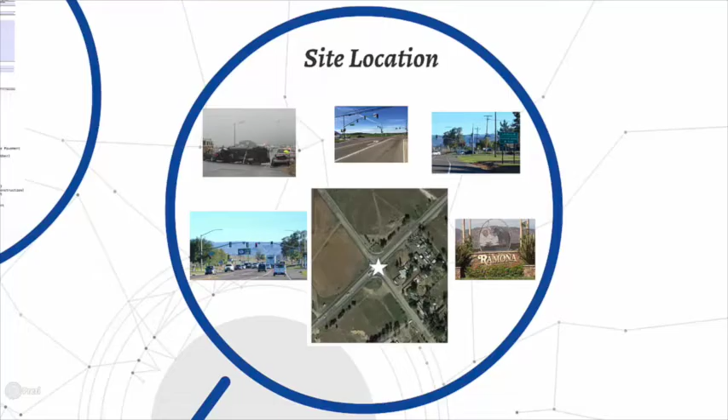This study was done to evaluate the potential geological concerns at the subject site, as it relates to the proposed development and design parameters. Based on the map from the Hydrology Manual of San Diego County, the soil in the area is Class C, meaning that it has a slow infiltration rate. There are no fault zones in close proximity, as well as no active seismic zones.

However, the soil on site is prone to liquefaction, which is why the topsoil and subsurface soil should be removed and compacted again. Earthwork will consist of site preparation, excavation, and compaction. Any compressible material must be removed, and oversized rock should be hauled off-site. The soils on site can be used for compacted fill if they do not contain any debris, organic materials, or oversized rock. The fill soils should be relatively compacted to at least 90% based on the maximum dry density of the ASTM test method D1557.

An R value of 30 was used for the pavement design based on our experience of the area and the review and evaluation of geological and geotechnical literature. The new pavement structure will consist of a hot mix asphalt surface course and Class 2 base and subbase. After conducting a geotechnical investigation of the site, the proposed development is feasible from a geotechnical perspective.

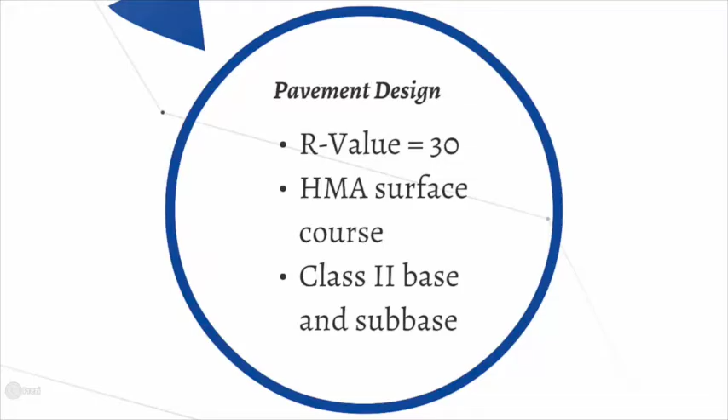The existing facility consists of SR67, which is a 2-lane rural highway with traffic lanes and shoulders of 12 and 8 feet respectively. A 12-foot left turn lane and a 12-foot right turn lane are present in the north and southbound directions, and it is maintained by the state of California. Highland Valley and Dye Road consist of a 12-foot traffic through lane, one 12-foot left turn lane, and an 8-foot shoulder in both directions, and it is maintained by the County of San Diego.

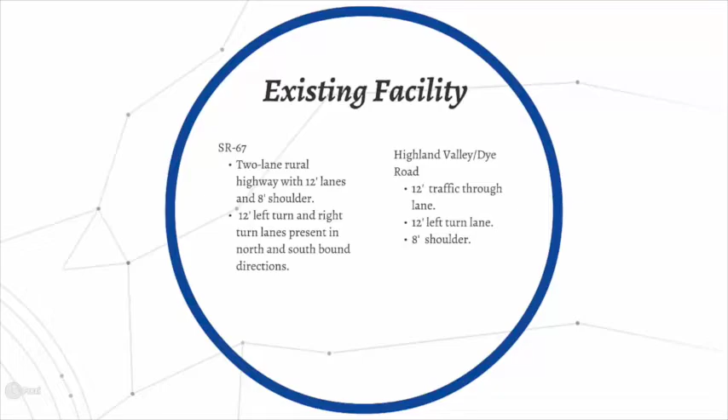The traffic analysis report analyzes the current traffic and future conditions of the intersection. This is a key intersection but experiences more traffic than nearby intersections. The existing peak hour volumes were analyzed to assist in determining the level of service. The method used to determine the level of service of the intersection was based on average vehicle delay from the Highway Capacity Manual and the principles of highway analysis. The level of service of the intersection is usually E or F, which is undesirable and considered unstable flow of traffic, and it should usually be C or higher.

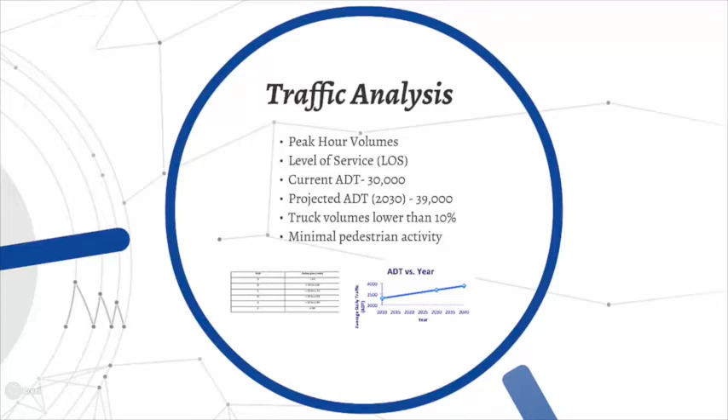Average daily traffic volumes of the intersection are around 30,000, and the projected future traffic will be around 40,000 by 2040, meaning there will be a 33% increase at least. It is important to consider truck and pedestrian data for design. Truck volumes are typically lower than 10% in the area, and there is minimal pedestrian activity. It is recommended to design a two-lane roundabout to improve the flow of traffic.

Intersection volumes were converted into roundabout volumes to determine the number of lanes based on the operational analysis by the National Cooperative Highway Research Program report. The capacity was usually greater than 1,000 passenger cars per hour, so at least 2 lanes are required based on the report. The circulatory roadway shall consist of individual lanes of 14 feet, resulting in a total of 28 feet. The central island will be 108 feet, and there will be a truck apron around it. The inscribed circle diameter is 180 feet.

SR67 and Highland Valley Dye Road both will have two 12-foot lanes in both directions, separated by splitter islands. Since there is minimal pedestrian activity based on the traffic analysis, the design includes a 5-foot bicycle lane that will end near the crosswalk for the pedestrians on the splitter island, so bicyclists can traverse the roundabout like pedestrians. According to the traffic analysis, SR67 experiences much more traffic than Highland Valley Dye Road, and through traffic volumes were substantially greater than the right and left turn traffic.

The proposed roundabout shall include entry radii that are larger on Highland Valley Road than SR67, since the most volumes are through traffic on SR67. To achieve this, the alignment of the roundabout will not be exactly on the intersection to promote the desired curvature

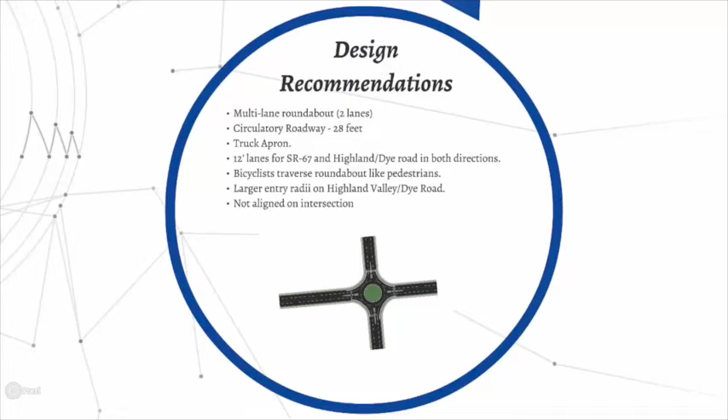for the radii. This design shall allow the traffic on Highland Valley Road to decelerate and yield due to the larger entry radii for deflection, so the most traffic volumes, which is through traffic on SR67, can be distributed consistently, resulting in an improved flow of traffic, improved level of service, and reduced congestion.

Ramona City is within the San Dieguito watershed, which is one of the 9 watersheds in San Diego County. The intersection is part of Santa Maria Valley hydrologic area. The natural water paths direct the water flow towards Santa Maria Creek. Based on the hydrology study conducted on the project area, the stormwater runoff drainage system is designed.

Prior to designing the roundabout stormwater drainage system, the existing condition was studied. 3 culverts were found in the project area. The 2 on-site culverts will be removed in the proposed modifications applied on the drainage design. The off-site culvert is found to be applicable for the proposed drainage design.

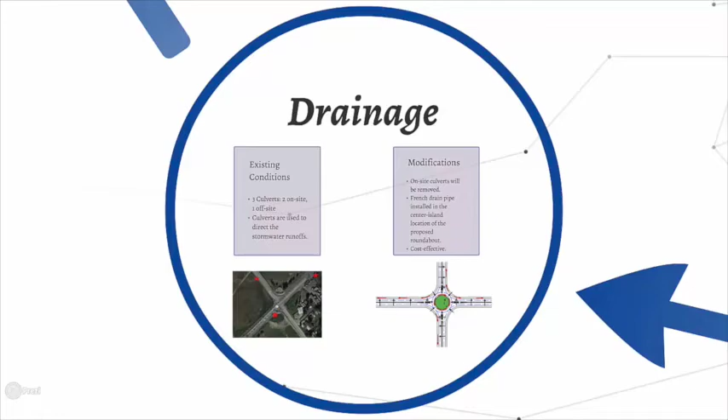The proposed runoff drainage design for the roundabout features 1 pipe installed at the central island of the roundabout. The circulatory roadway will be downgraded with 2% slope, which allows the runoff to flow towards the curb opening. An open channel will be implemented to carry the runoffs to the pipe. Roundabout legs will not feature culverts. Legs will be graded with 2% slope.

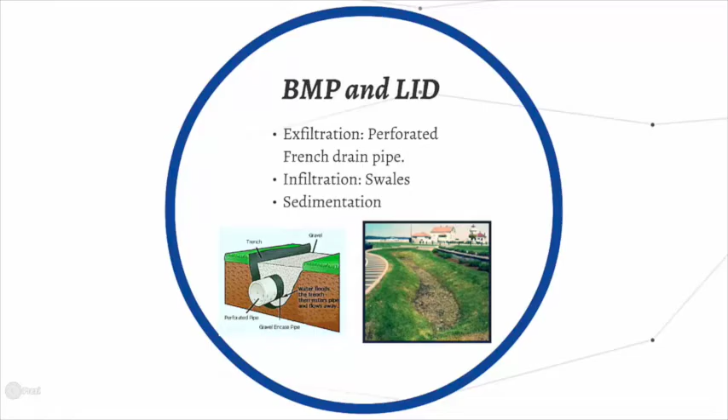To meet the BMPs and LIDs requirements, swales will be used to infiltrate stormwater runoffs. Also, a perforated French drain pipe will be implemented. Coarse gravel will cover the surrounding area of the pipe to aid in exfiltrating the stormwater runoff.

The construction scheduling of the project starts with a basic planning for the work breakdown structure and ends with a detailed graphical representation of the sequence of tasks in each sector of SR67 and Highland Valley Roundabout. The objective of scheduling is to determine the time and sequence of all operations in the project and their assembly to give the project its overall completion time, and hence find the compatibility with the project's cost.

With the utilization of programming tools such as Primavera P6, the procedure of scheduling starts with breaking the tasks into digestible set of components, establishing task durations based on realistic estimation and application experience, and binding the activities together through specific relationship types to run the critical path method, CPM.

The reason behind using CPM method is to manage the time needed for the network activities to be completed and list the critical activities in a mathematical algorithm. This method helped us determine the start and finish dates of each activity.

The work breakdown structure contains earthwork, structural items, drainage items, environmental items, traffic items, and other specialty items. Each section contains activities that are internally connected with relationships and externally connected with other sections' activities.

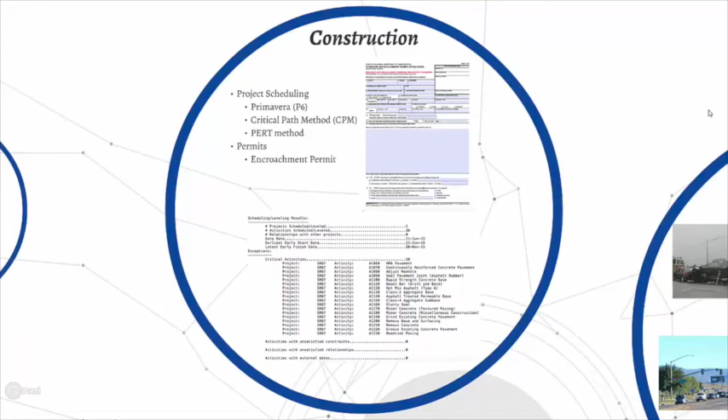The study of the environmental impact report discusses the impacts and issues that might arise from the proposed project. The project includes various environmental concerns that can be potential issues regarding the environment. Mitigation attempts were taken to lower the impacts on the environment before the project initiation. There are 4 different areas that are considered to be affected with the project being accepted. Those areas are biological resources, water quality, noise, and air quality.

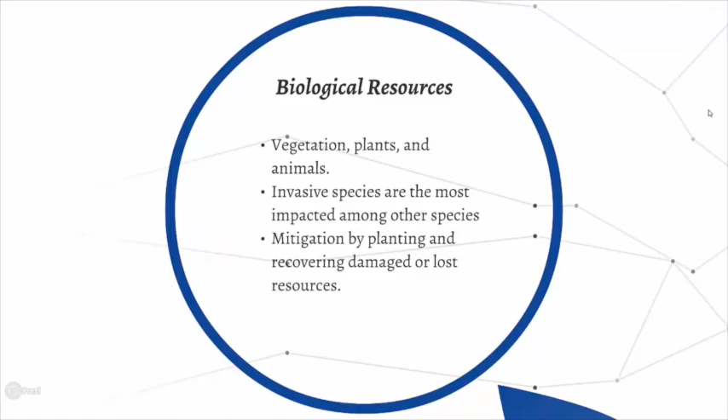Biological resources are of most concern in this project. It is required to mitigate any impacts on the biological resources that include vegetation, plants, or animals. Invasive plants are the most impacted resources in this project. Mitigation plans were carried out for those invasive species by relocating the endangered plants to the roundabout island. Also, we decided to plant a ratio of 3:1 for the other plants that might get affected.

The water quality is also an important concern for this project. There are several wells around the area of the project that can be affected while constructing the roundabout. Therefore, all existing wells that might be affected by blasting and constructing will be covered during the construction phase.

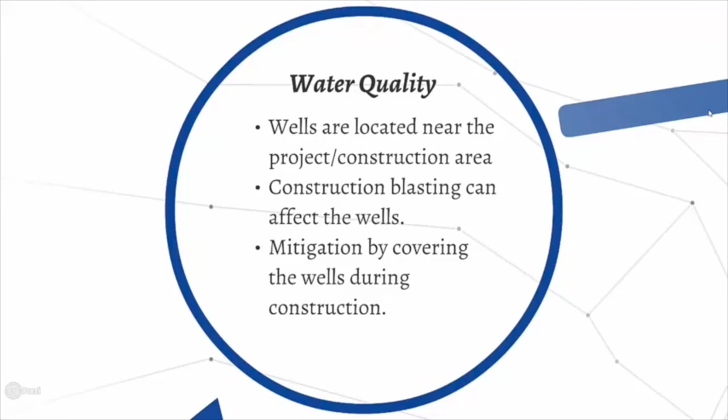Noise is also an important factor to be considered in this project. Noise will be mitigated by not exceeding the sound level of 75 decibels while constructing the roundabout between the time of 7 a.m. to 7 p.m.

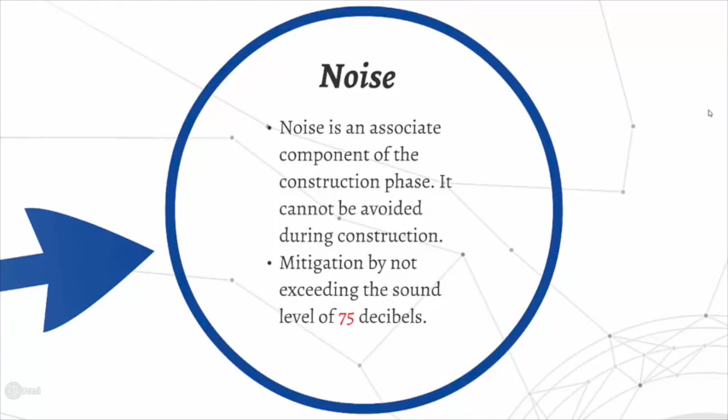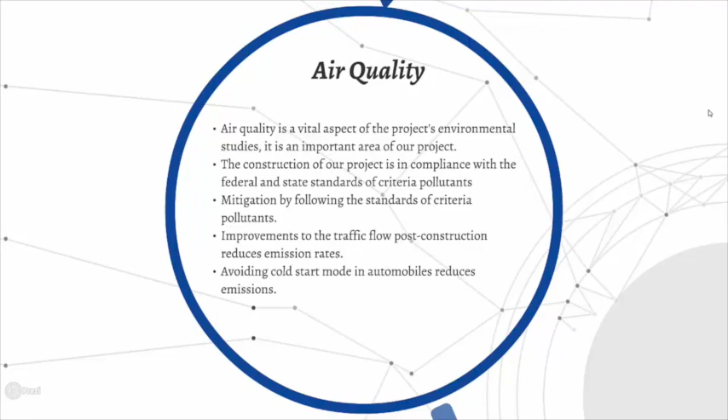Air quality is also a crucial factor to be taken into consideration. While constructing the roundabout, the standards for the federal and state criteria pollutants will be followed. Moreover, post-construction of the roundabout will greatly improve the flow of traffic and will avoid cold start mode for vehicles. Thus, the emissions from the roundabout will decrease. Overall, those impacts on the environment were determined to be insignificant.

The SR-67 and Highland Valley Roundabout project was found to be applicable to the intersection. The roundabout improves the level of service and lessens the queuing in the area. Our roundabout design will safely and efficiently improve traffic flow and reduce congestion.